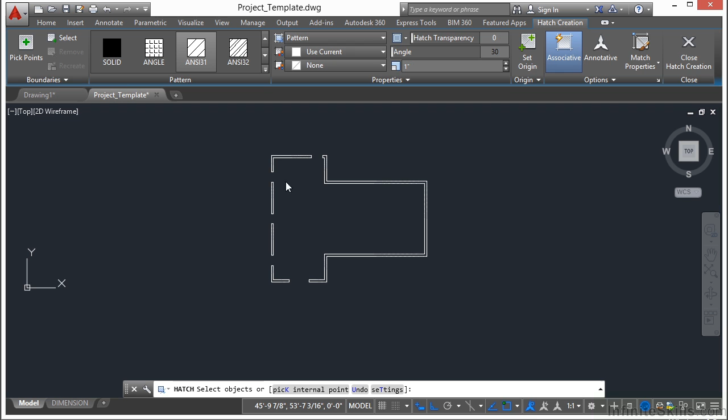And we want to use a hatch pattern of ANSI 31. And our angle is going to be at 30 degrees. And let's pick inside our objects. You can zoom in. We're going to use the pick points option. Click in here. That pattern is a little too tight, so we're going to give it even a little more. Let's set that to 20, and that looks good.

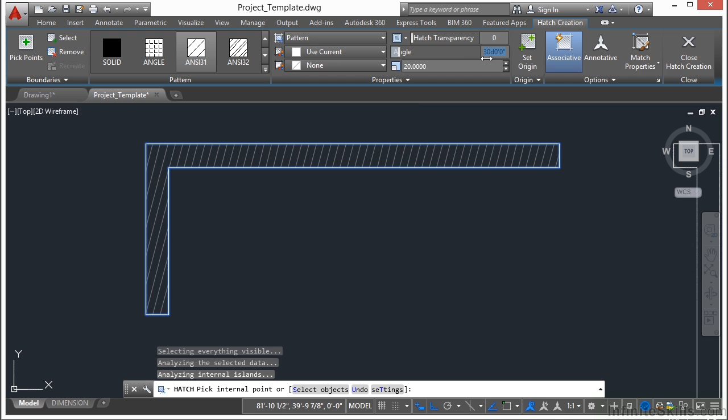So that's the pattern we're going to use. ANSI 31 at 30 degrees with a scale factor of 20. And we're going to pick inside each of these objects. And sometimes when you zoom in too closely, AutoCAD just kind of freaks out and it can't handle it. So you just have to zoom out a little bit, pick in the exact same spot, and it still works. I know it's crazy. It's really annoying. That's just one of the little things about AutoCAD.

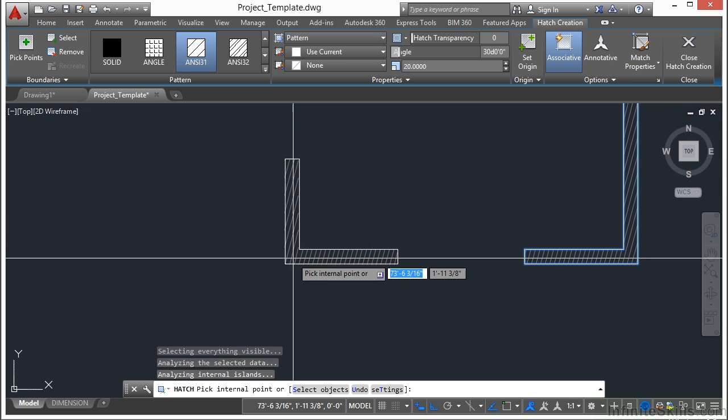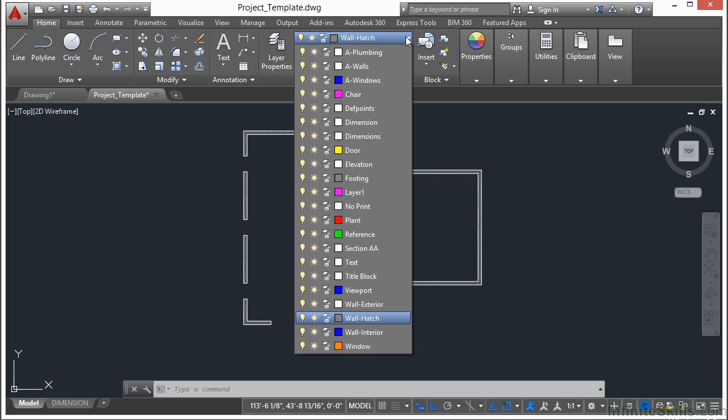So just keep filling in each of these wall sections with your hatch pattern until you get them all filled in. When you're finished, press enter. So there's our exterior wall with a little bit of a hatch. Now we need to put in a few interior walls. So let's change our layer. We're going to go to Wall Interior.

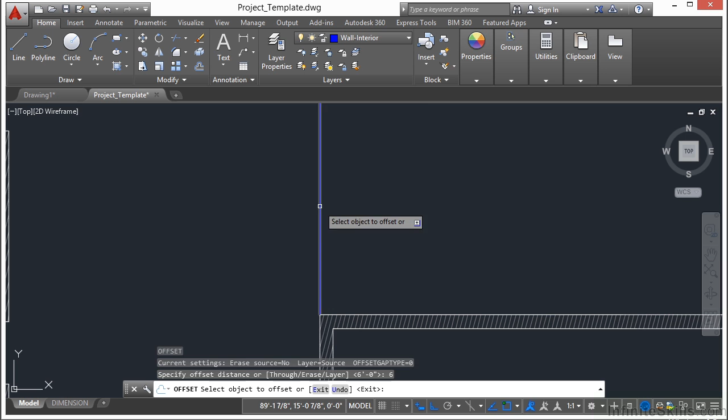Start the line command. And we're going to start off right here. Snap to this endpoint. And just draw it straight down to this endpoint. Press return. Now we're going to offset this line. Offset it 6 inches. And offset that to the right. Now we need to offset from the top 12 feet, press enter, and we're going to select this line here and go down. There it is.

Use your match properties command, type in MA, press enter. Since this is going to be an interior wall, select one of your interior walls that you've drawn here and select that item. That way it will look the same. Use the extend command, select this line here, press enter, and pick that one. Press return again. Now we need to offset this line, make it 6 inches. Pick that and to the bottom.

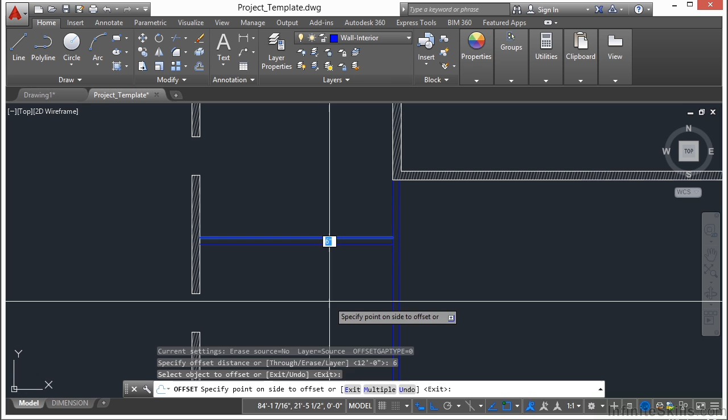So now we're going to put a doorway in right here. So we're going to use the offset command, 1 foot, 4 inches. Press enter, select that line, offset to the right. Offset again, 3 feet, press enter, select this line and offset it in. Now use the match properties again. Type in MA, select this line, and then pick these two. That way they're all on the interior wall layer.

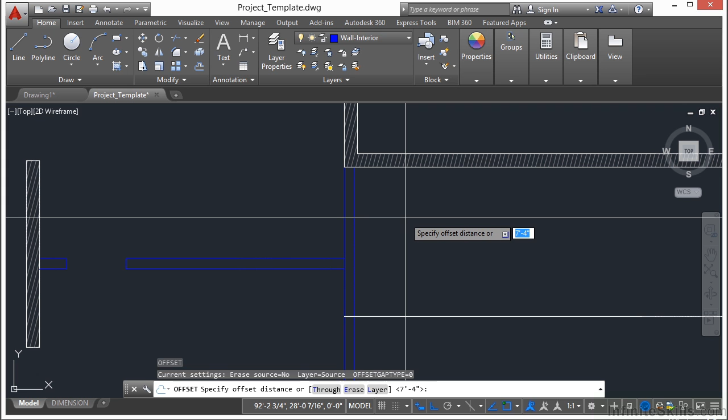Use the trim command, select all these items, press enter, and trim it up so that we have this nice little opening. Now we're going to put a little doorway here. Offset again, 7 feet, 4 inches. Select your line here, move it down. Press return, offset 6 feet. Select the line and go down.

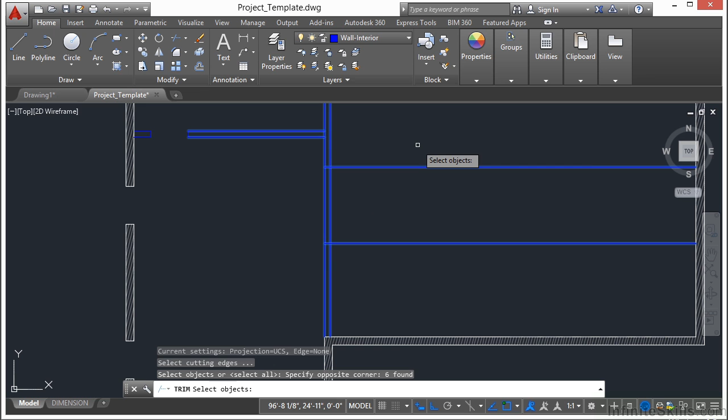Press return. Type in MA for match properties. Select the blue line and then pick these 2 white lines. Press enter and then trim. We're going to trim all of this up here. So select all of these lines. Press return. Trim those away, and get that little bit out of there too.

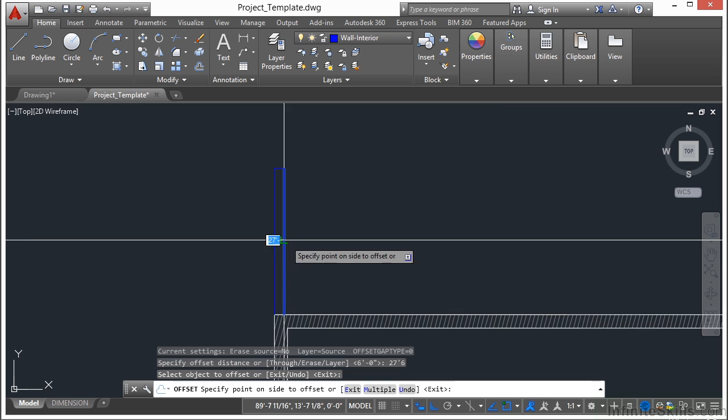So now we have our exterior walls, we have our interior walls, and the last thing we need is to put a little movie screen. So we're going to offset 27 feet, 6 inches, pick this line here, go to the right, click, and return. And then use the extend command, select that line, press enter, come down here and pick the blue line so that now it goes all the way across our room. And now we're almost done with our model.

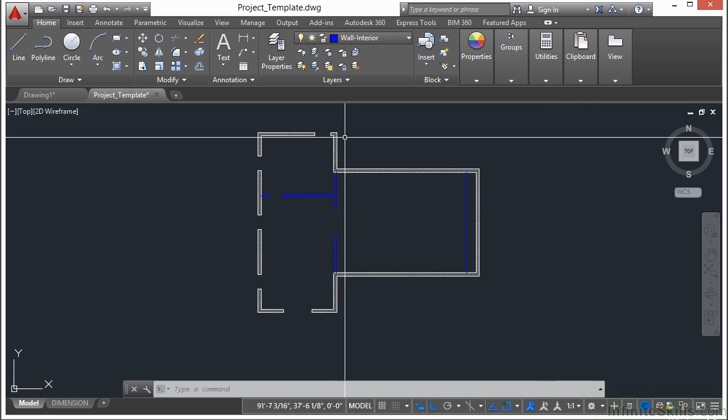We just have a few more things that we're going to do in the next section. We're going to insert the doors, the windows, some plants, and some chairs.